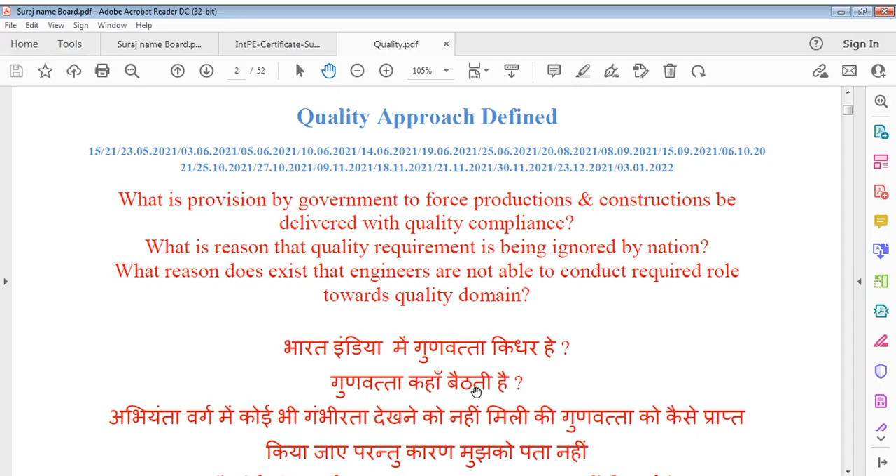Engineers were not required because there was repetitive engineering in those cases, or you can say conventional engineering. There's a time when you used to do stonework, then later brickwork.

But when structural engineering comes into play, we generally call it by the title structures or structural engineering, which is a part of civil engineering itself. Civil engineering is a wide field, and structure is a very important item within it. Structure means we have to make sure it performs successfully.

Structure doesn't mean a term only; it's the unity of body of a building, or you can say it's the framework of a building, of a structure, of whatever you construct.

A structure takes load. Whatever actions or forces are applied or imposed on a structure, these forces are taken by the structure, resisted by it, and transferred further down. Finally it goes to soil level, and is dispersed forever into soil, which we cannot call back.

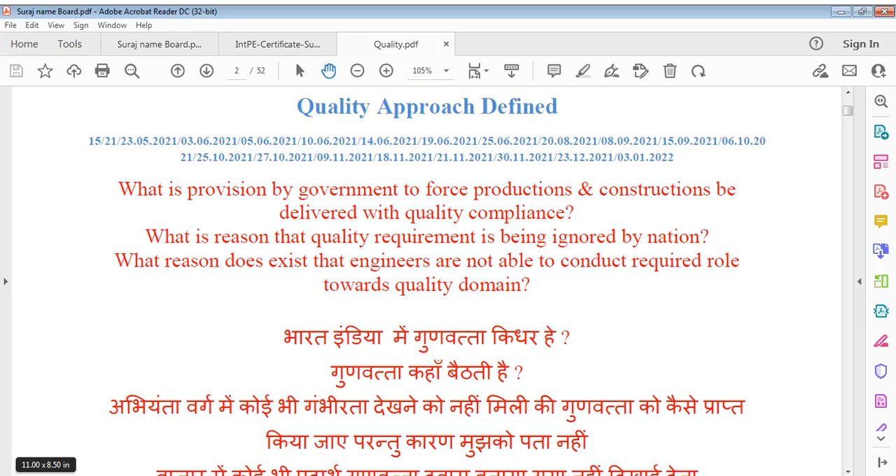My question is, what provision is there by government to force productions and constructions to be delivered with quality compliance? What is the reason that quality requirement is being ignored by the nation? What reason exists that engineers are not able to conduct the required role towards the quality domain? These are certain questions, very few questions, and there can be many more. As I said in the beginning, where does quality exist? Why does it not exist? There can be more questions—who is responsible for that?

What about the major material, concrete, in structure? What about major materials that are permanently included in structures and buildings? What about engineering materials being used to produce various hundreds of parts and goods in manufacturing? These all relate to the state of quality in our country, Bharat, India, and also in many other countries. I have written some—

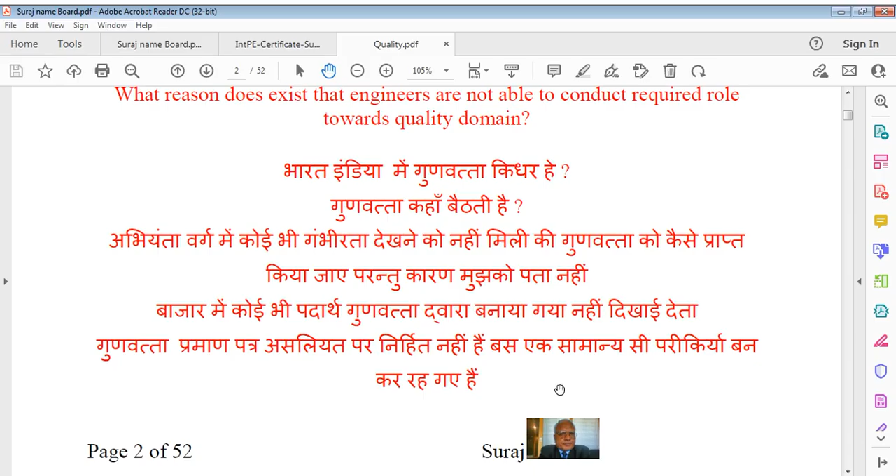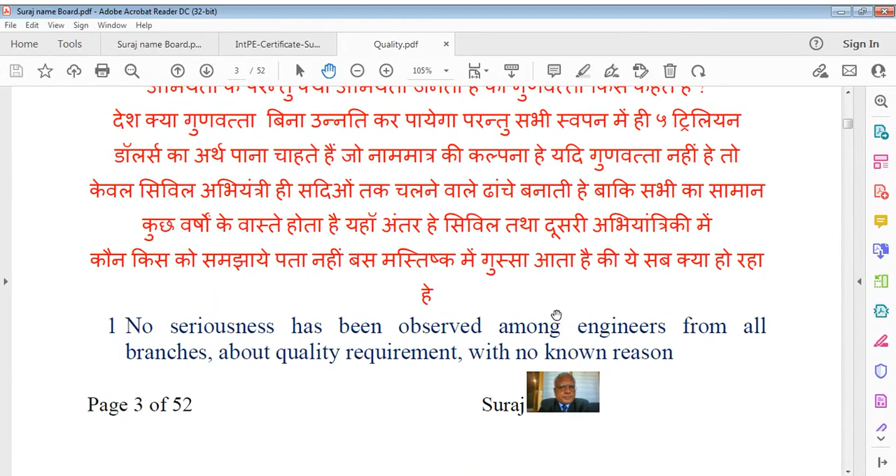Again, no seriousness has been observed among engineers from all branches about quality requirement, with no known reason. If there is some issue, there should be some reason, because there is no reason in this—that's why you could say there's no issue. That is mathematical consideration and equation, but the issue exists, because no material in the market is available that can give quality performance.

No material in markets is available that can give quality performance, yet quality mark is owned by every material manufacturer. How is it possible? This means that quality certification is not perfect, it's not reliable, or it is just for name's sake, whether it is private or government. Quality exists nowhere, it is certain for sure. It exists only in lip services, or in publicity, or in just fake claims, just to deceive purchaser, so that purchaser buys your material, your product.

And who is responsible? Partly you can say engineers have forgotten quality because of individuality or whatever reasons, and also that engineers did not study it properly, and quality could not be understood or could not be taught by professors because they themselves may not know what quality means. It means quality in education is absent. This means quality of education in itself is absent. Quality cannot be taught in education.

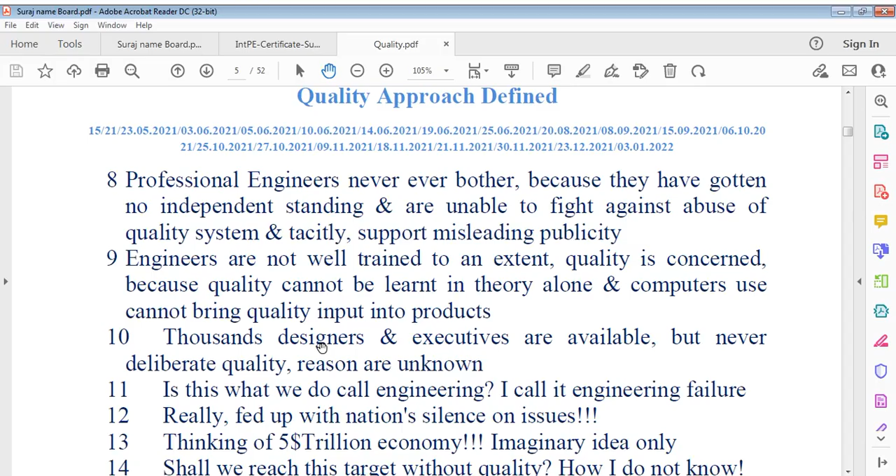I say every organization is certified by a quality system, but the existence of quality is poor. Why? Another reason is government least bothers, because it does not care for engineering and engineering products, and companies least bother because they are commerce and business oriented and believe in short-cut earning methods. These are certain points we have to consider—no long-term vision, we can say. And professional engineers never ever bother because they have gotten no independent standing and are unable to fight against abuse of the quality system, and tacitly support misleading publicity.

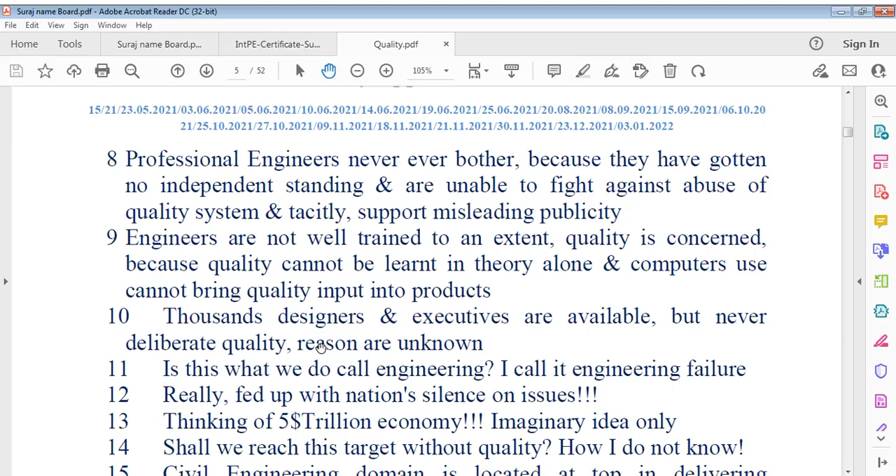So we can say it's a complex of questions, complexity of questions we are talking of. But where does the problem lie? My question is that—where does the problem actually lie, and why have we been ignoring it?

It's a very simple answer, I can say. Again, I say when you learn engineering, when one becomes professional, one must be given, you can say, value. It's not that you always remain an infant. When you do an engineer's job, it may be the lowest one, but it is responsible oriented. Engineer means responsible oriented because it's part of life, part of economy. No economy in world can develop, no economy in world can move if engineers cannot keep themselves well oriented, well trained, well used to the job, and the reliability factor remains higher.

Engineer means use all these resources - material, human resources, machine resources, time resource, money resource, value resource - and to meet demand with supply, and to meet supply with demand. This is a very complex statement, you can say, but this is reality.

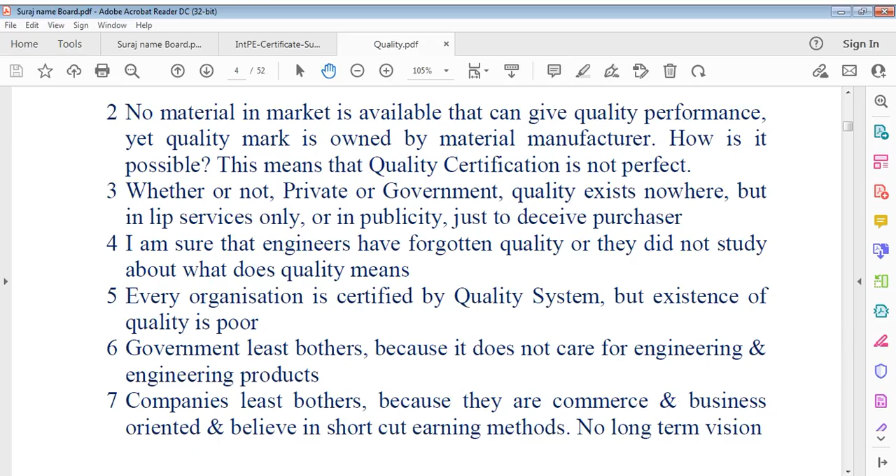Whether you are national or international, it has no value now until you provide good products. Nobody believes in quality these days, and that's a fact. Maybe a few percentage of people are there who work, but people are more or less business oriented and they believe in shortcut methods of making money, and no long-term vision stands these days. That's why I say professional engineers never ever bother.

Professional engineers never bother, because they have gotten no independent standing and are unable to fight against abuse of quality system, tacitly supporting misleading publicity.

Professional engineer, when I say this, means an engineer who stays engaged in the profession. It doesn't mean just educationally qualified—education qualified plus experience, or you can say plus the habit of learning more and more.

Only experience is not enough. You cannot simply count on experience of so many years if that experience is only doing repetitive jobs, rather than doing more based on more learning or teaching. Engineering is such a field that if you work, you have to learn something every day, or teach someone something every day.

No engineering knowledge remains constant. Every day you learn something in whatever way—maybe in 24 hours you learn at least one or two hours of something. Otherwise, sometimes we don't even know we're learning.

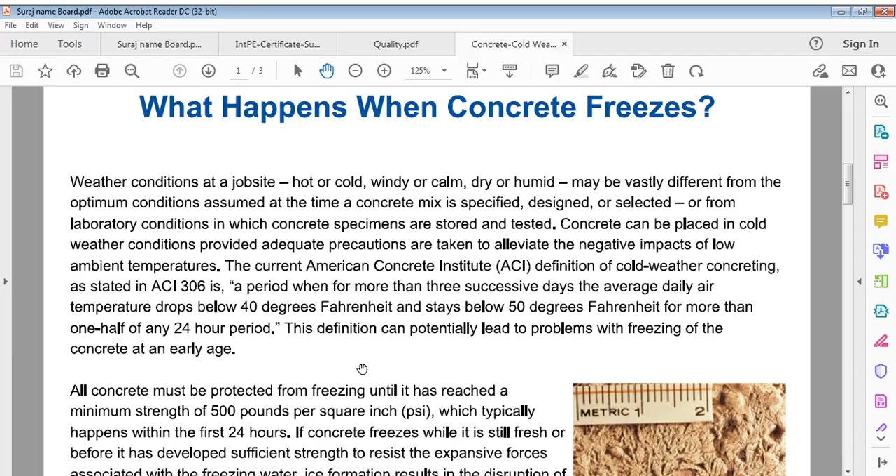And there is some reference from an institute, we know that's ACI - American Concrete Institute - which also defines cold weather concreting, in reference ACI 306, and it defines that. We have already defined that, but what we say here is that all concrete must be protected from freezing until it has reached a minimum specified strength. And if concrete freezes while still fresh, or before it has developed sufficient strength to resist expansive forces associated with the freezing water, ice formation results in disruption of the cement paste matrix, causing an irreparable loss in strength. You can say if it freezes, it can result in reduction up to 50% in ultimate strength - 50% reduction can be.

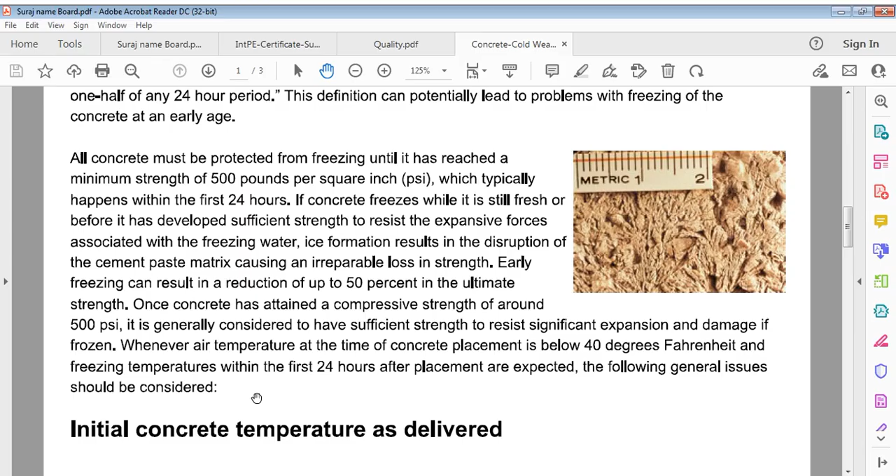Once concrete has attained the required compressive strength, it is generally considered to have sufficient strength to resist significant expansion and damage if frozen. So the definition of temperature is there, we already know it. So what we say is protection while concrete is placed, consolidated, and finished - they have used the word consolidated, okay, it's a different word in different countries, we have to know what it means. Exposure of concrete to cold weather conditions extends the time required for it to reach initial set, meaning the initial setting time is automatically impacted, which requires finishing crews to be available for a longer period depending on actual ambient temperature.

Protection of a concrete placement may require use of windbreaks, enclosures, or supplementary heat. It's also appropriate to adjust concrete mixture constituents for the effect of ambient temperature on setting time, which may require an increase in cement content or use of an accelerating chemical admixture, or both.

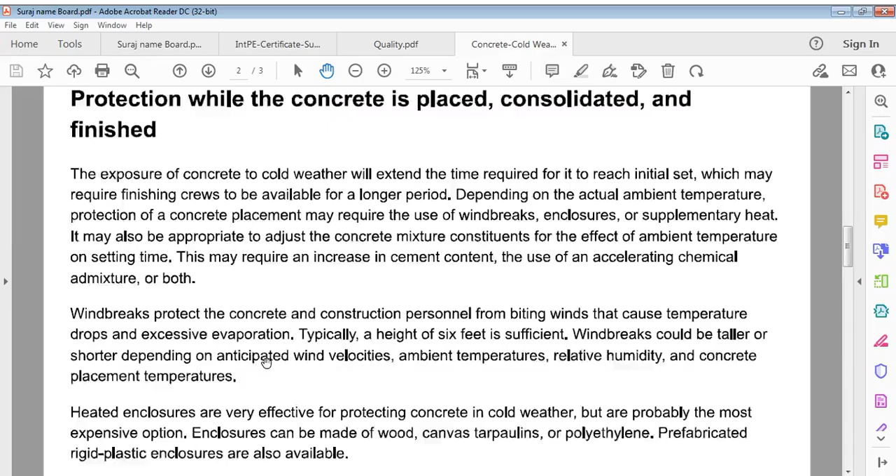So these are certain points we are reconsidering, and we can say why. Windbreaks protect concrete and construction personnel from biting winds that cause temperature drops and excessive evaporation. You may say 1.8 or 2 meters height is enough for windbreaks, but taller is better, depending on existing wind velocity, ambient temperature, and relative humidity at the time we place concrete.

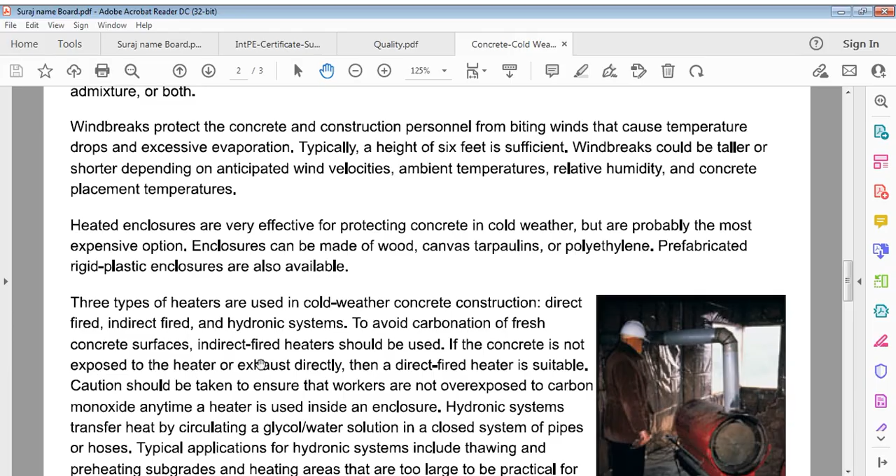Enclosing that area, or heated enclosures, are very effective for protecting concrete in cold weather conditions, but it's expensive because you have to spend money on wood, canvas tarpaulins, or polyethylene. Prefabricated rigid plastic enclosures are also available. So you can also use heaters.

Types of heaters used in cold weather construction can be direct fired, indirect fired, or a hydronic system. To avoid carbonation of fresh concrete surfaces, an indirect fire heater should be used. If concrete is not exposed directly to the heater or exhaust, a direct fire heater is suitable. Caution should be taken to make sure workers are not overexposed to carbon monoxide.

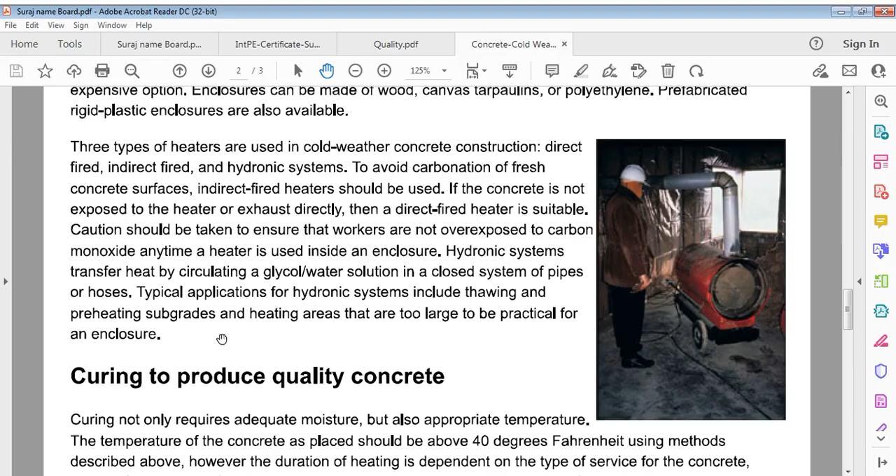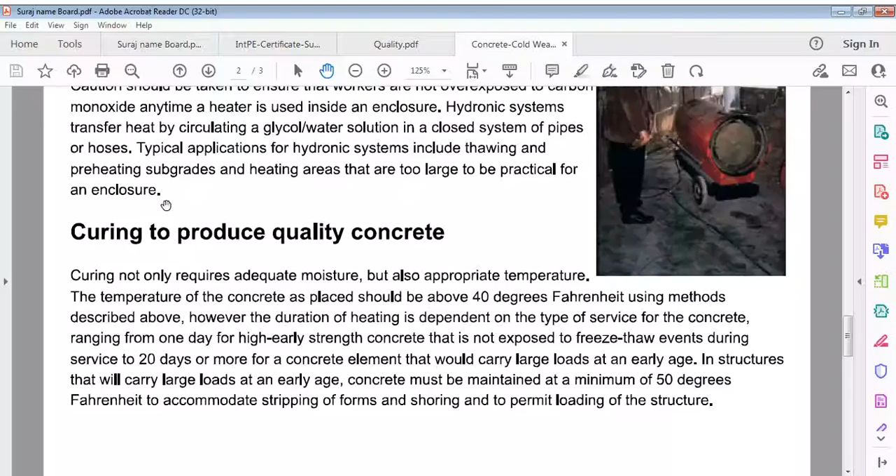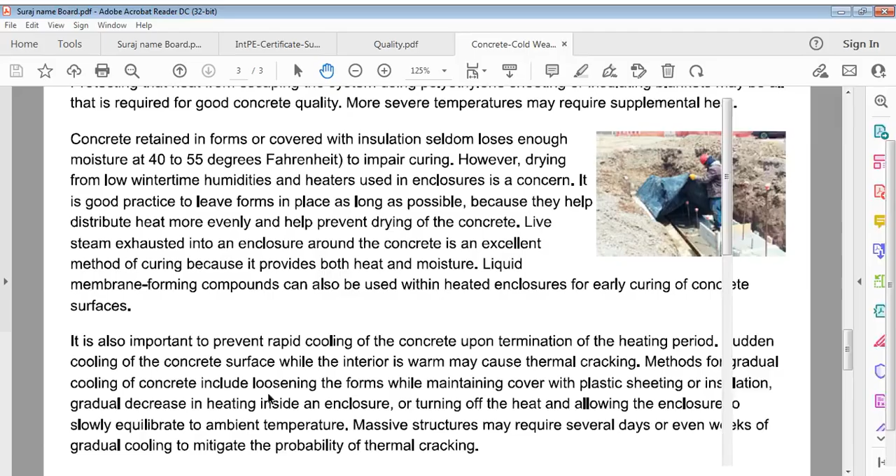Curing not only requires adequate moisture, but also appropriate temperature. You have to understand all this, and we have it in the file. I don't want to go on repeating this, so let's go to the other file. This is about concrete in cold weather conditions. In this file, it's just one page.

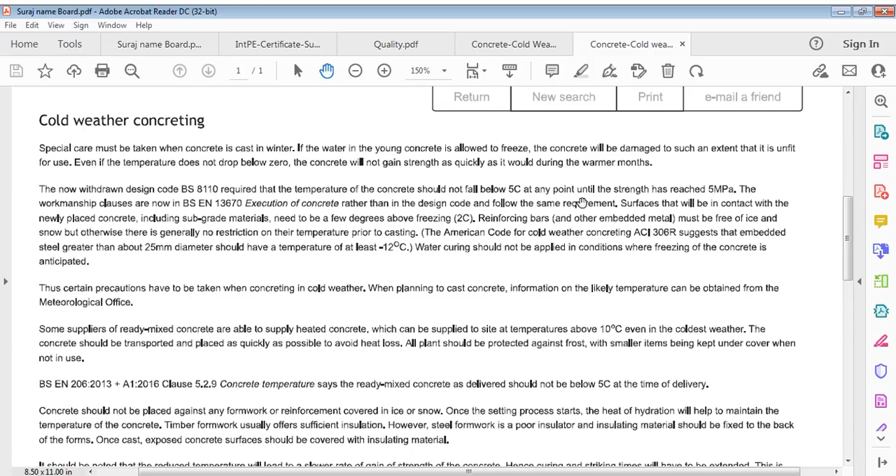Thus certain precautions are required when placing concrete in cold weather conditions. When planning to cast concrete, information on likely temperature can be obtained from our office or the meteorological department, as the contractor knows it. Some suppliers of ready-mix concrete are able to supply heated concrete, which can be delivered to site at a temperature above 10 degrees Celsius. That's good, in fact, even in the coldest weather.

Concrete should be transported and placed as quickly as possible to avoid heat loss. All plant should be protected against frost, with smaller items kept under cover when not in use. Ready-mix concrete that is delivered should not be below 5 degrees Celsius at the time of delivery, and should not be placed against formwork or reinforcement covered in ice or snow. This is a point to remember.

Once the setting process starts, heat of hydration helps maintain the temperature of concrete. Timber formwork usually offers sufficient insulation, however steel formwork is a poor insulator, so an insulating material should be fixed to the back of the form. Once cast, exposed concrete surfaces should be covered with insulating material.

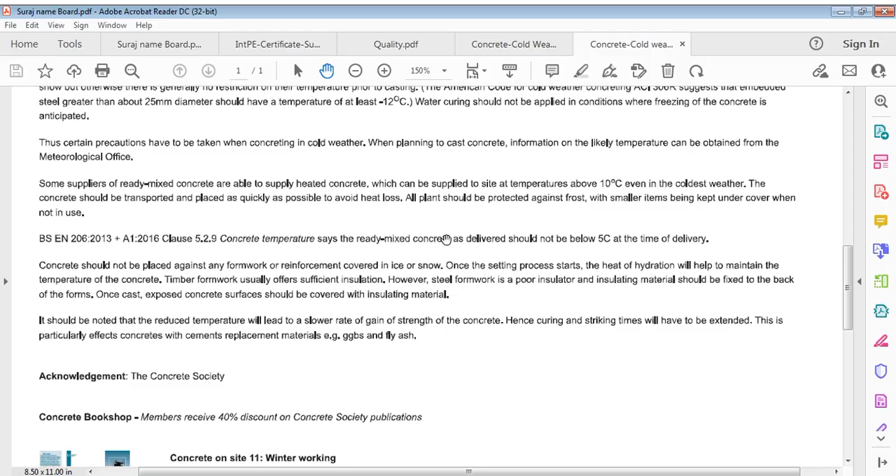It should be noted that reduced temperature shall lead to a slower rate of gain of strength of concrete. Hence, curing and striking times have to be extended. This particularly affects concretes with cement replacement materials, such as GGBS and fly ash.

This is one file I tried to reference to. I'm closing this file to open another, and that is this diagram, a guide to cold weather concrete and precautionary tips for pouring concrete. Let's take this one first. It says concrete precautionary tips for pouring concrete. I repeated this before also, but I'm just telling you some points for refreshing.

It states that there are some mistakes we have to avoid when working with concrete in cold weather. When temperature fluctuates, concrete is subject to different curing conditions, resulting in sporadic strength gain.

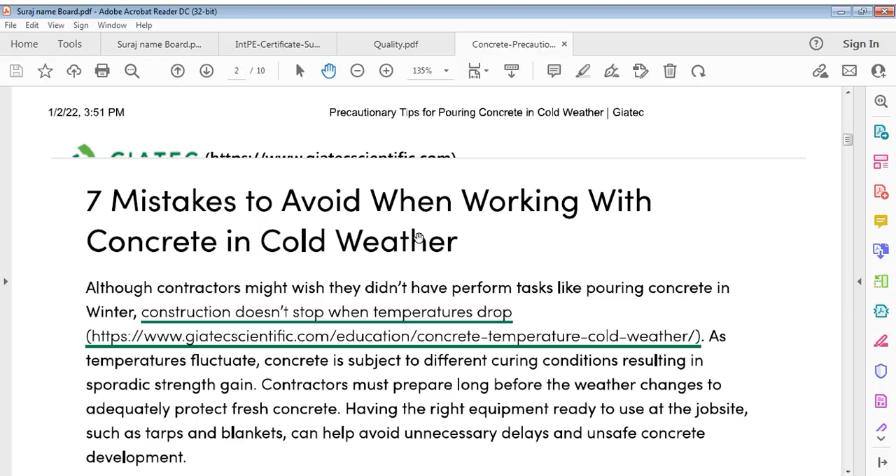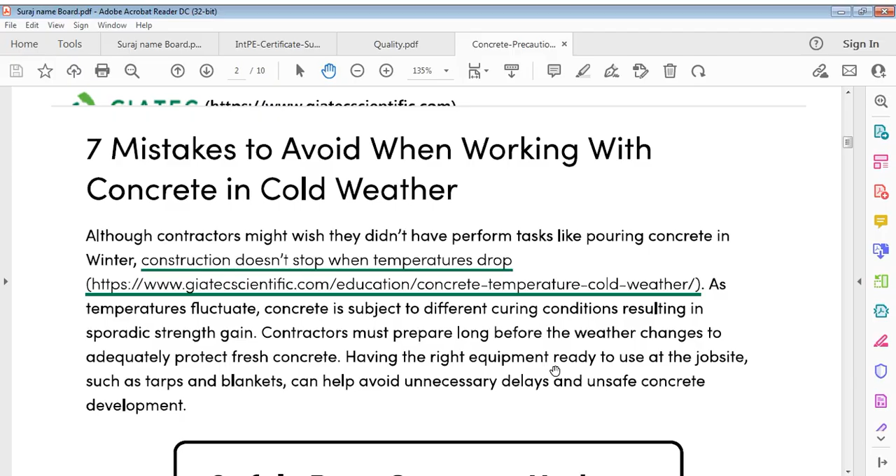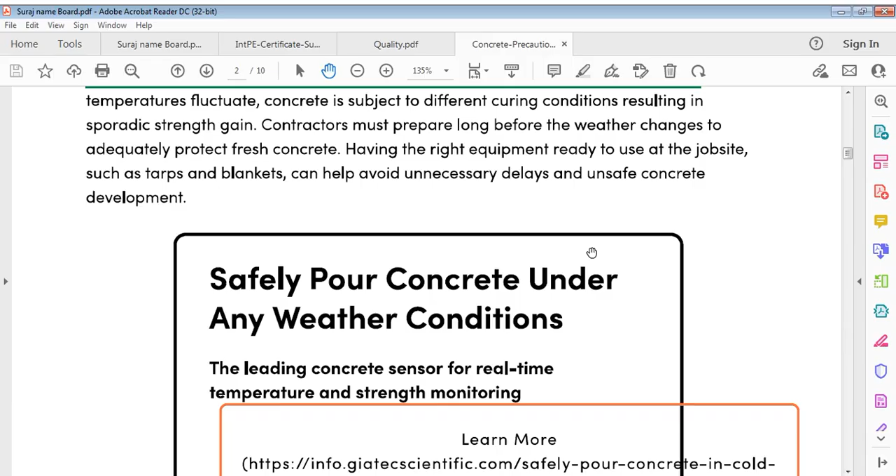Contractors must prepare long before weather changes to adequately protect fresh concrete. Having the right equipment ready to use at the job site, such as tarps and blankets, can help avoid unnecessary delays and unsafe concrete development.

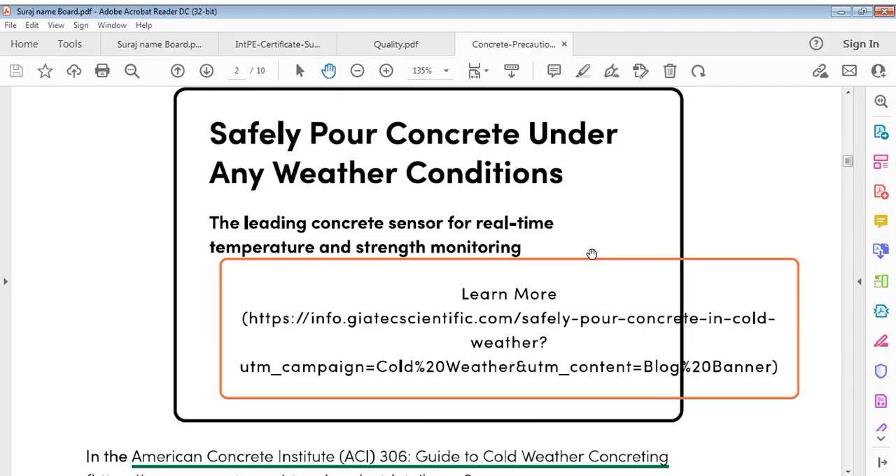Concrete with different temperature gradients doesn't develop strength adequately, leading to cracks and possible structure damage or disaster. When placing your concrete, placement of the slab factors into the effectiveness of concrete curing conditions.

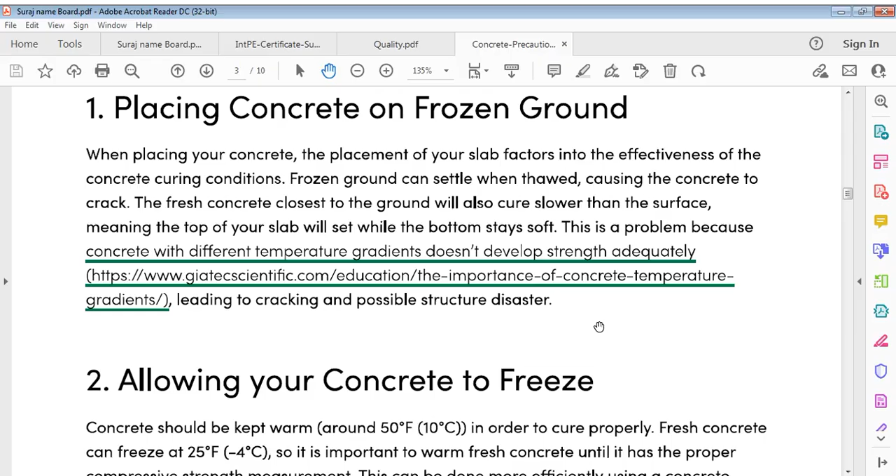Frozen ground can settle when thawed, causing concrete to crack. Fresh concrete closest to the ground also cures slower than surface concrete, meaning the top portion of the slab sets while the bottom does not set at the same time.

If you allow concrete to freeze, that's another mistake. Concrete should be kept warm in order to cure properly, at a temperature around 10 degrees Celsius. Though it's not warm, in the language of temperature, concrete can be called good at about 10 degrees Celsius.

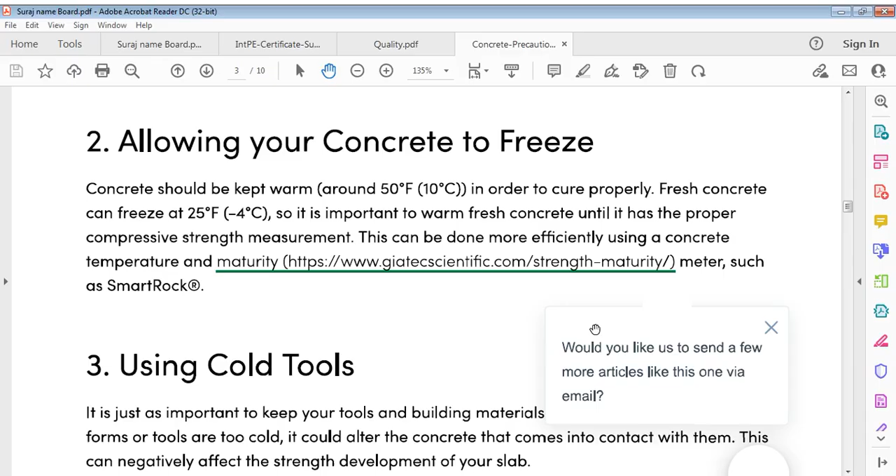Fresh concrete can freeze at -4 degrees Celsius. That's why it's important to warm fresh concrete until it has proper compressive strength, and this can be done better using a concrete temperature meter.

Then we have using cold tools. It's important to keep your tools and building materials, forms or tools, from being too cold. It could alter the concrete that comes into contact with them, negatively affecting strength development of your slab.

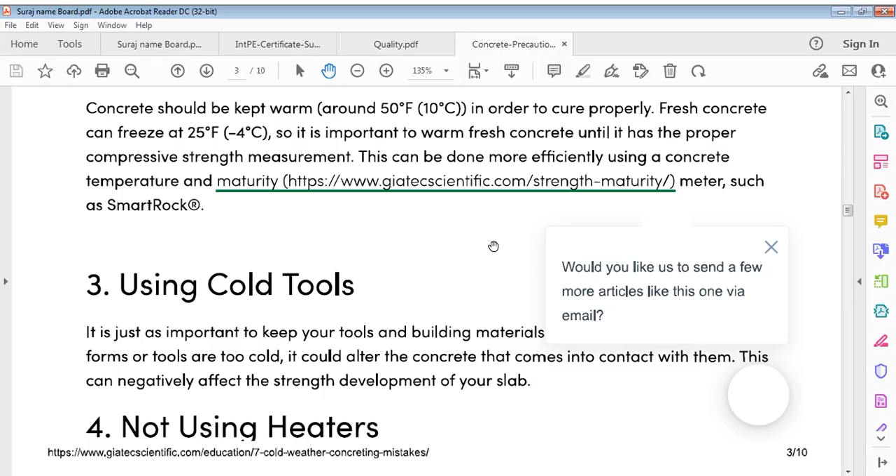Another mistake is not using heaters. Concrete requires staying warm in order to continue curing and develop strength. If it gets too cold in temperature, curing stops altogether.

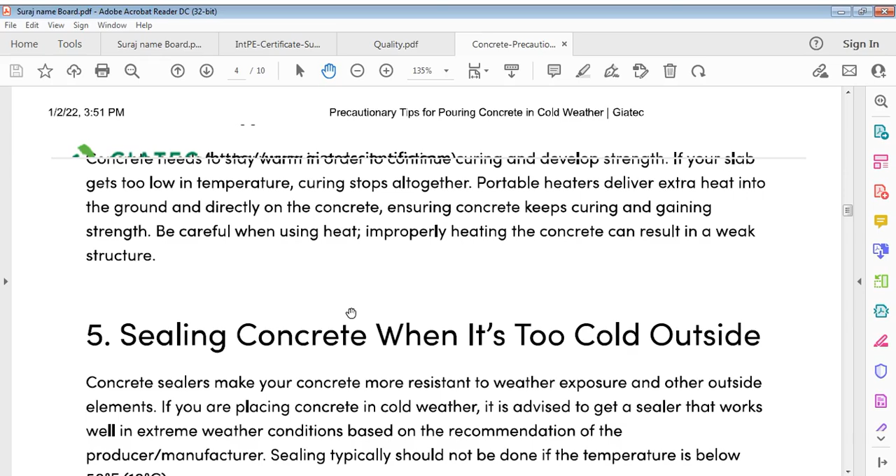Portable heaters deliver extra heat into the ground and directly on concrete, ensuring concrete keeps curing and gaining strength. Yet take care when using heat - improperly heating concrete can result in weak structures.

Don't seal concrete when it's too cold outside. Concrete sealers make your concrete more resistant to weather, exposure, and other outside elements. If concrete is placed in cold weather, it's wise to get a sealer that works well in extreme weather conditions, based on the recommendation of the manufacturer. Sealing typically should not be done if temperature is below 10 degrees Celsius.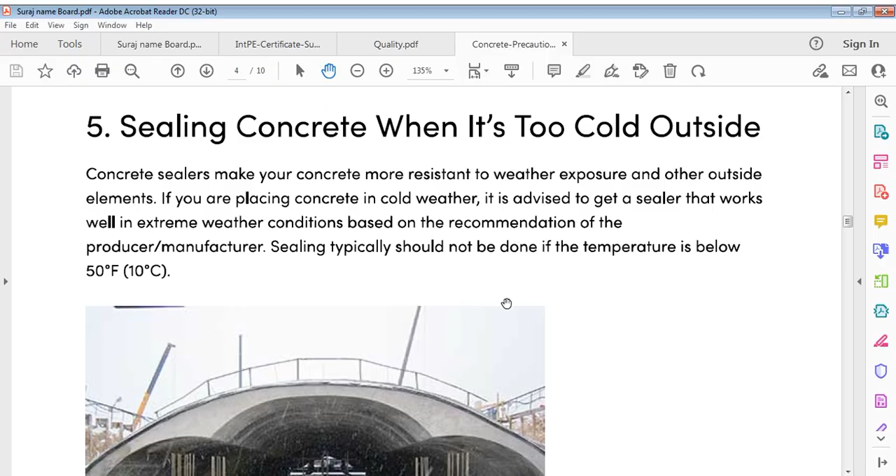Of daylight lessens.

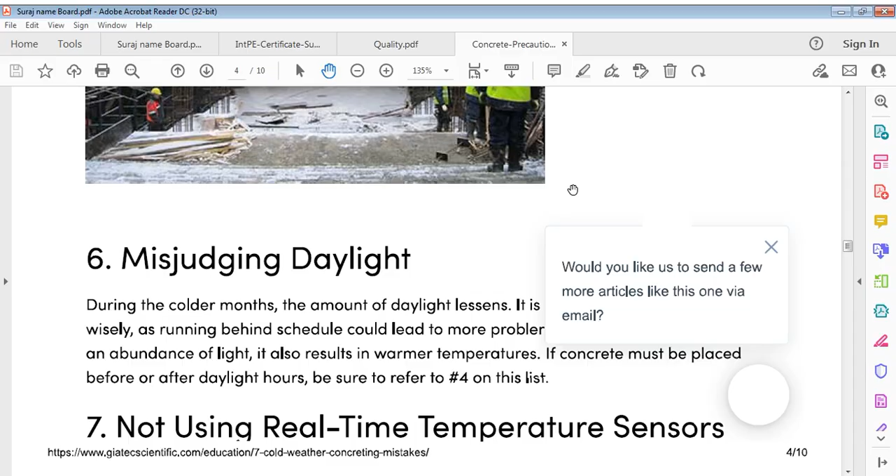Temperature monitoring in cold weather is important to ensure production of high quality concrete that meets thermal control plan specifications. If proper attention is not given to strength development of concrete, several common problems can occur.

Among these problems are freezing of concrete at early ages, lack of required strength, rapid temperature changes, inadequate protection of the structure and its serviceability, and improper curing procedures.

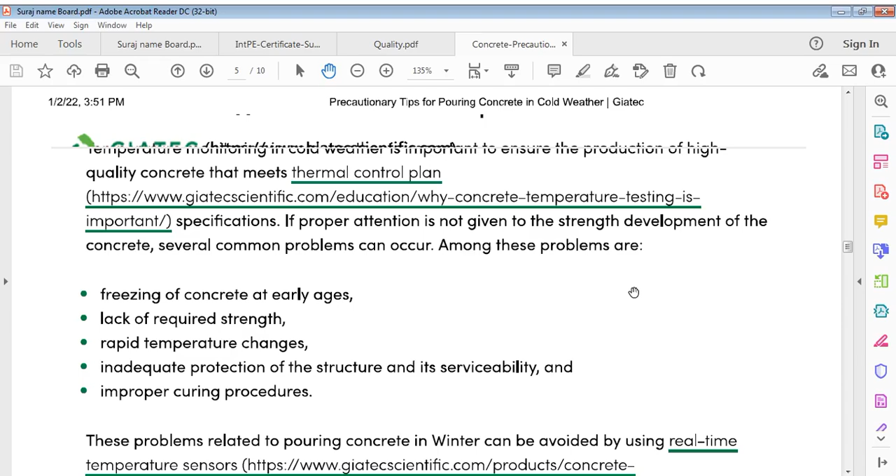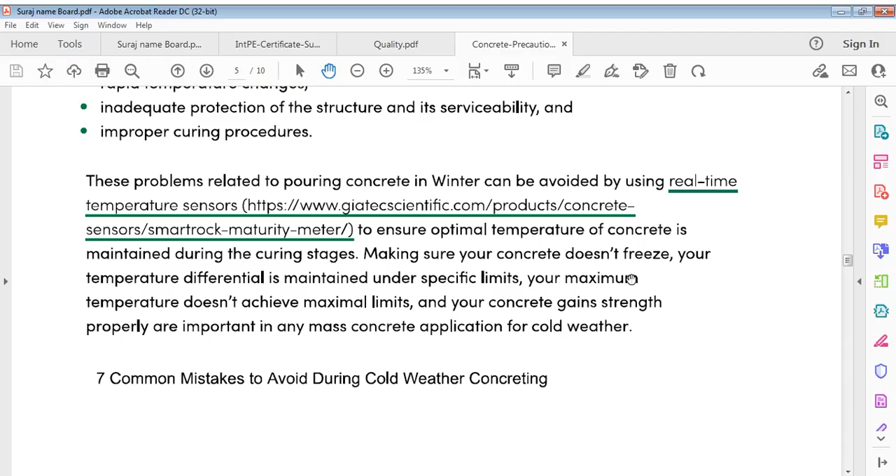Problems with concrete in winter can be avoided by using real-time temperature sensors to ensure optimal temperature of concrete is maintained during curing stages. Making sure concrete doesn't freeze, temperature differential is maintained under specific limits. The maximum temperature should not exceed limits, and concrete gaining strength properly is important in whatever mass concrete is applied for cold weather.

This was what it says, for example, as reference. According to many construction experts working on concrete, cold weather is certainly difficult. Pouring can be difficult, as also being exposed to humidity and wetness of cold weather.

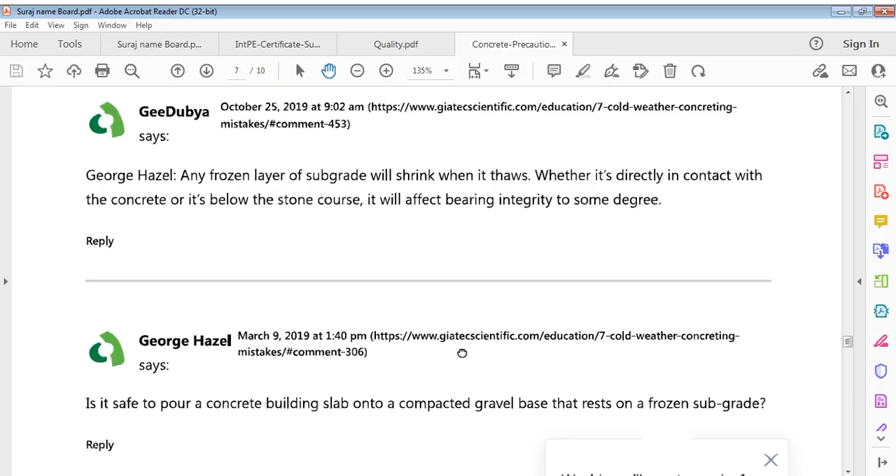A frozen layer of subgrade shrinks when it thaws. When it's directly in contact with concrete or it's below stone course, it shall affect bearing integrity to some degree. Is it safe to pour concrete onto a compacted gravel base that is frozen? There are so many such questions, and we can answer them.

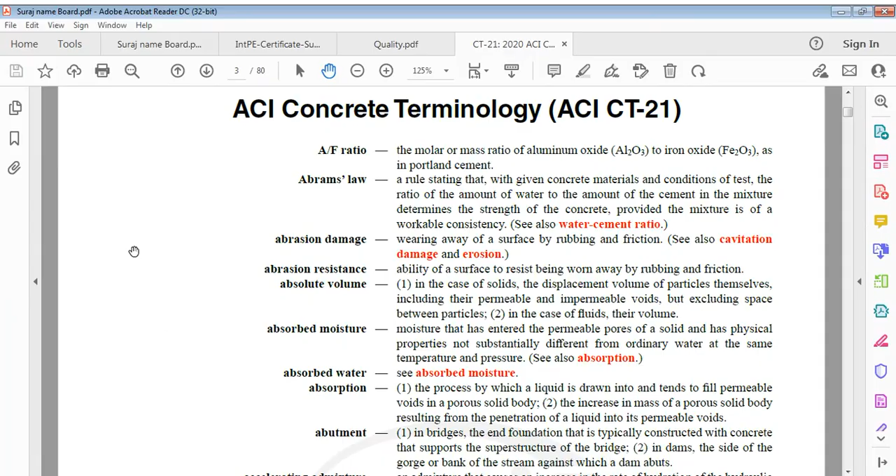AF ratio, what does it mean? Size, molar or mass ratio of aluminum oxide. Let me blow up a little more so we can see better. This is concrete terminology from ACI CT 21. AF ratio is molar or mass ratio of aluminum oxide Al2O3 to iron oxide Fe2O3 as in Portland cement. A stands for Al2O3 and F stands for iron oxide. This is called the mass ratio of aluminum oxide Al2O3 divided by iron oxide Fe2O3 as in Portland cement. These general definitions are terminology, not sequenced, provided alphabetically here.

Abrams' law: a rule stating that with given concrete materials and conditions of test, the ratio of amount of water to amount of cement in the mixture determines the strength of concrete, provided the mixture is of a workable consistency. This is also known as the water cement ratio.

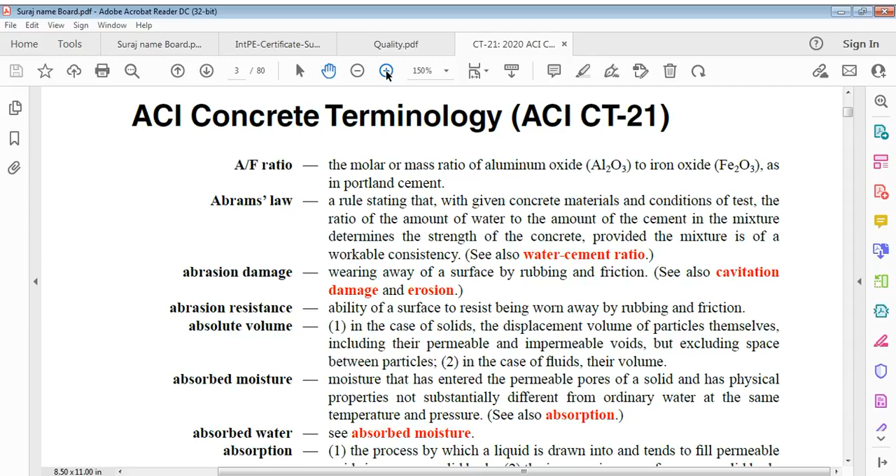Videos and audio signals have fallen. I hope the video doesn't stop and it's not working.

There is another one, absorption. My voice may not be recorded. Let me continue, some signals are there now. Let's say absorption, there are also two parts, that is the process by which a liquid is drawn.

Absorption is the process by which a liquid is drawn into and tends to fill permeable voids in a porous solid body. This is number one.

Absorption is also the increase in mass of a porous solid body resulting from penetration of a liquid into its permeable voids.

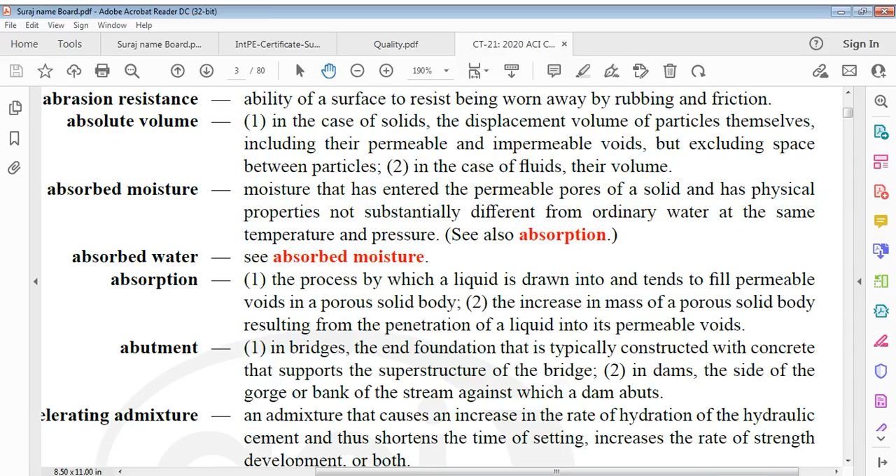Accelerating admixture it is. The signal drops continuously, both video and audio, 0, 0.

Accelerating admixture: an admixture that causes an increase in rate of hydration of hydraulic cement and thus shortens time of setting, increases rate of strength development, or both. It is called accelerating admixture because it accelerates the rate of hydration.

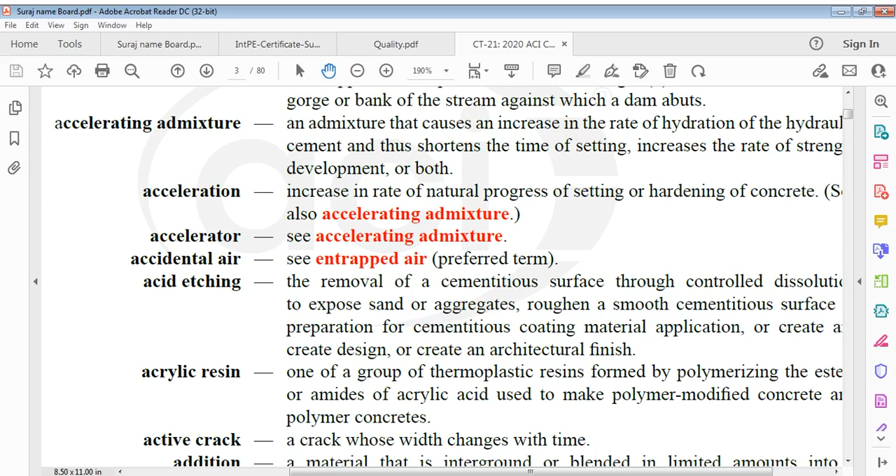This is, okay I see, so it is accelerating admixture defined. Again, signals continue to fail. I don't think I'll continue, 7 FPS and 0, 0 video and audio. 7 FPS means it won't work. I'm waiting, not sure if I got signals back or it's 7 FPS. Some signals, let us say, acceleration, FPS is 3, again very low. Okay, something.

Acceleration: increase in rate of natural progress of setting or hardening of concrete.

Accelerator and accidental air. We are now going to acid etching.

Acid etching is removal of a cementitious surface through controlled dissolution to expose sand or aggregate. It can also mean to roughen a smooth cementitious surface in preparation for cementitious coating material application, or to create art, create a design, or create an architectural finish.

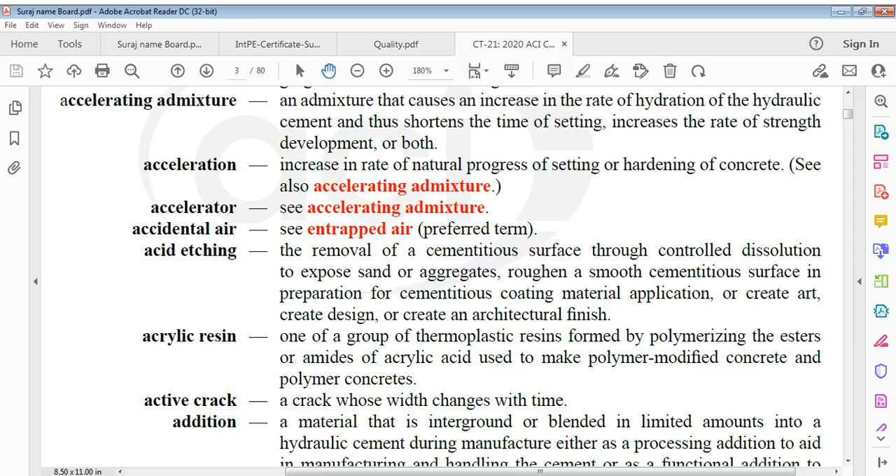Acrylic resin: one of a group of thermoplastic resins formed by polymerizing esters or amides of acrylic acid, used to make polymer modified concrete and polymer concretes.

Active crack: a crack whose width changes with time.

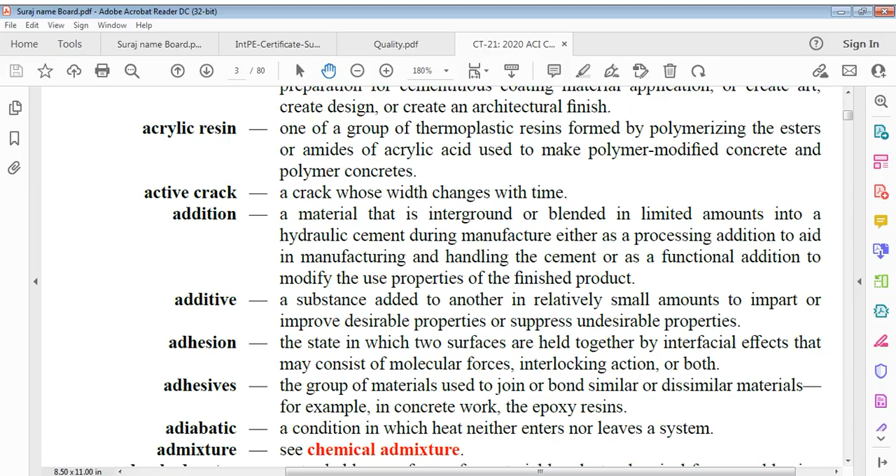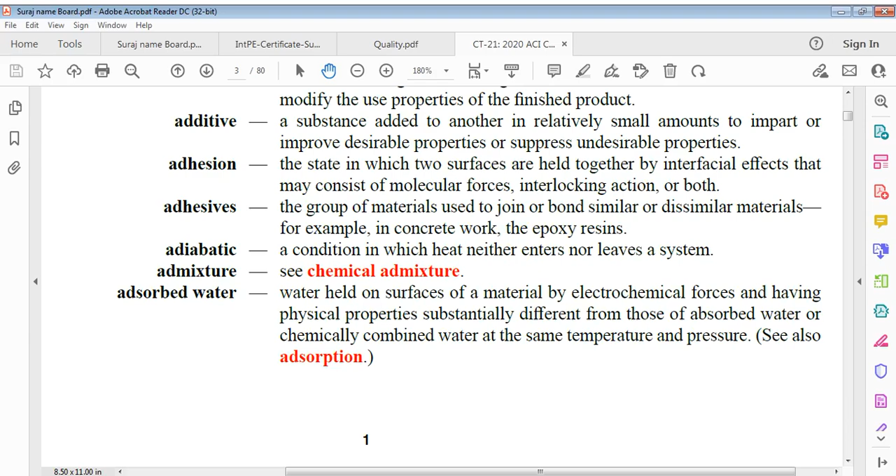Now, adsorbed water. Water held on surfaces of a material by electrochemical forces, and having physical properties substantially different from those of absorbed water. Mind it, we are talking adsorbed water, not absorbed water.

So what is our definition of adsorbed water? Again, because there's confusion on this: water held on surface of a material by electrochemical forces, and having physical properties substantially different from those of absorbed water or chemically combined water, at the same temperature and pressure.

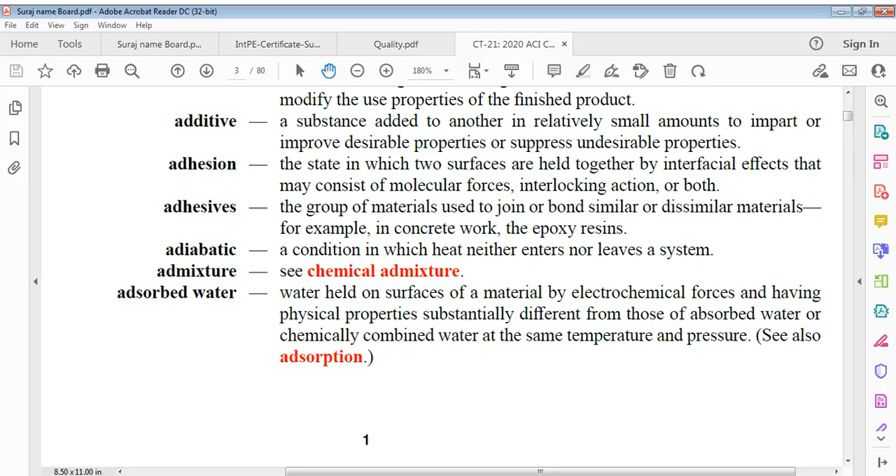Adsorption: development of a higher concentration of a substance at the surface of either a liquid or solid than exists in the bulk of the medium; the process by which a substance is adsorbed, such as at the surface of cement paste or aggregate.

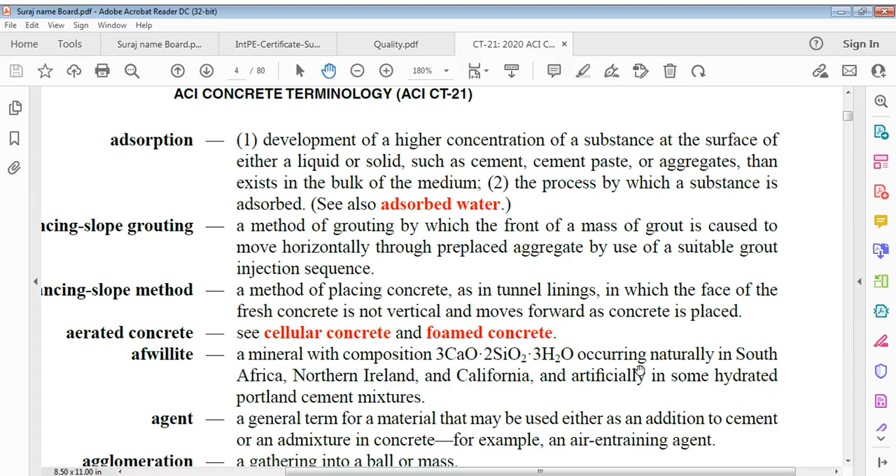Advancing slope grouting: a method of grouting by which the front of a mass of grout is caused to move horizontally through pre-placed aggregate by use of a suitable grout injection sequence.

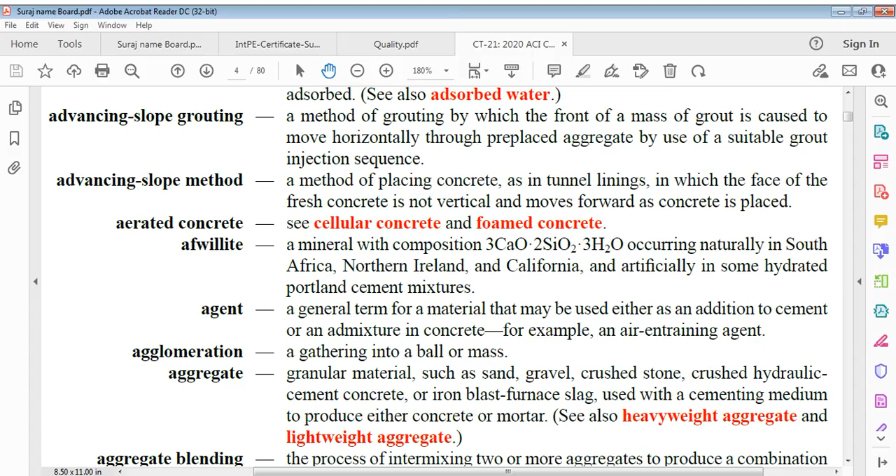Then we have aggregate blending. Aggregate blending is the process of intermixing two or more aggregates to produce a combination with improved grading or other properties.

Aggregate interlock is the effect of portions of aggregate particles from one side of a joint or crack in concrete protruding into a recess on the other side of the joint or crack, to transfer load in shear and maintain alignment. This is an important definition.

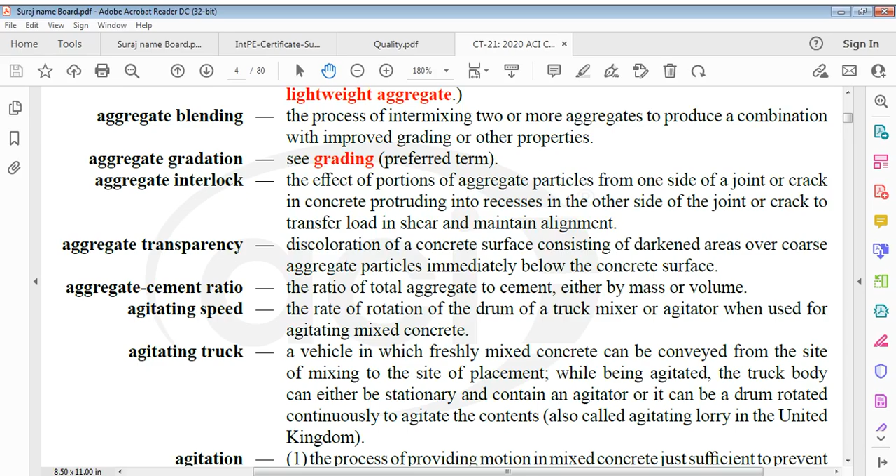Agitation is the process of providing motion in mixed concrete just sufficient to prevent segregation or loss of workability, and also mixing and homogenizing of slurries or finely ground powder by either mechanical means or injection of air.

Agitator is a device for maintaining workability and preventing segregation of mixed concrete by agitation.

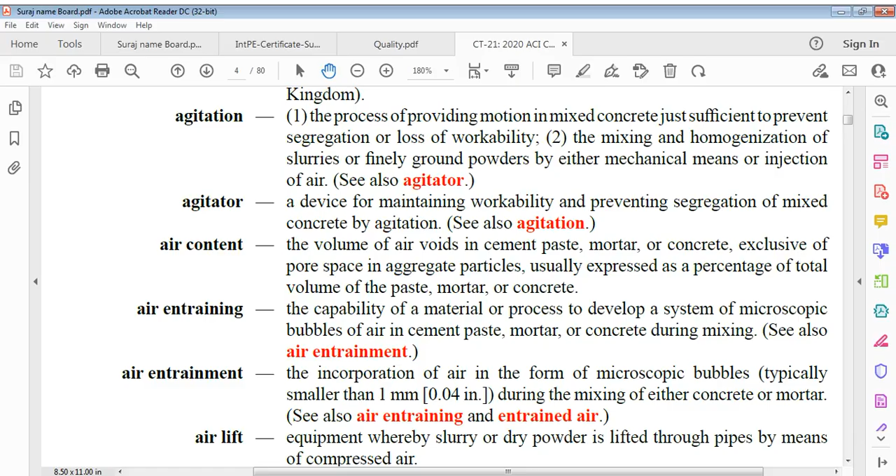Air content. Pore space in aggregate particles is usually expressed as a percentage of the total volume of paste, mortar or concrete.

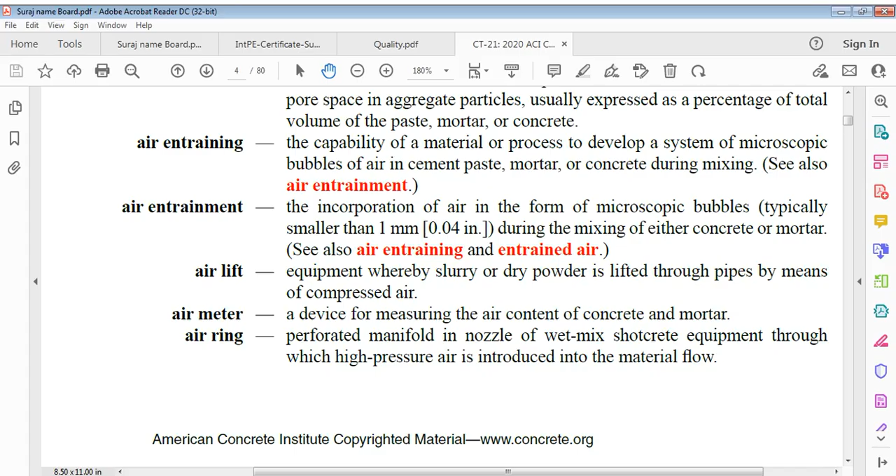Air content: volume of air voids in cement paste, mortar or concrete, exclusive of pore space in the aggregate particles, expressed as a percentage of the total volume of paste, mortar or concrete.

Air entrainment, air entrainment. I have to go up for a couple of minutes, just let me finish this.

Air entraining: capability of a material or process to develop a system of microscopic bubbles of air in cement paste, mortar or concrete during mixing.

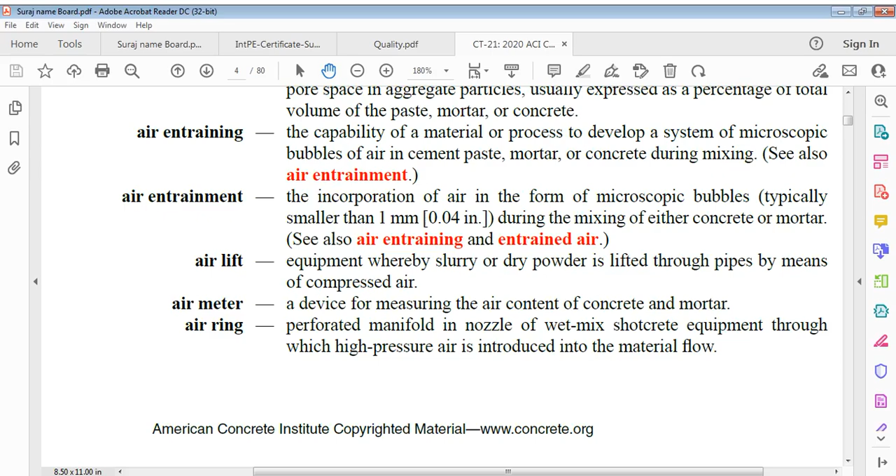We have then air separator. Just give me some minutes, I'll be back and do it.

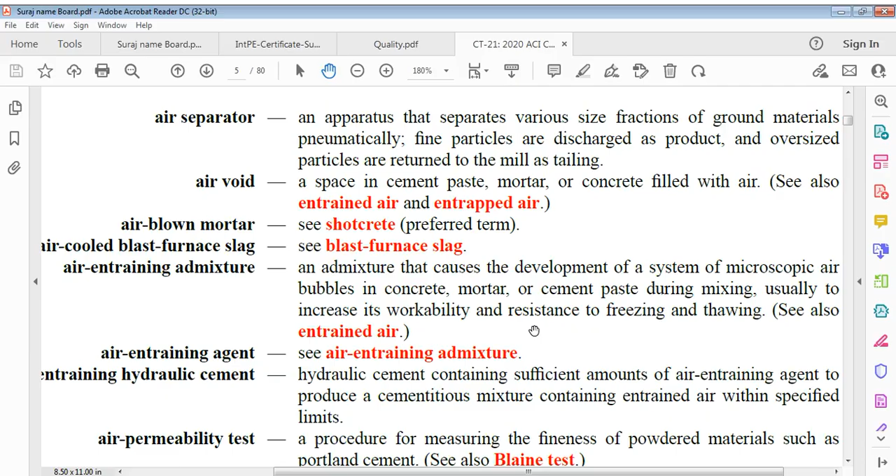An air void is a space in cement paste, mortar or concrete filled with air. Air blown mortar, we can say shotcrete, and blast furnace slag, and air entraining admixture.

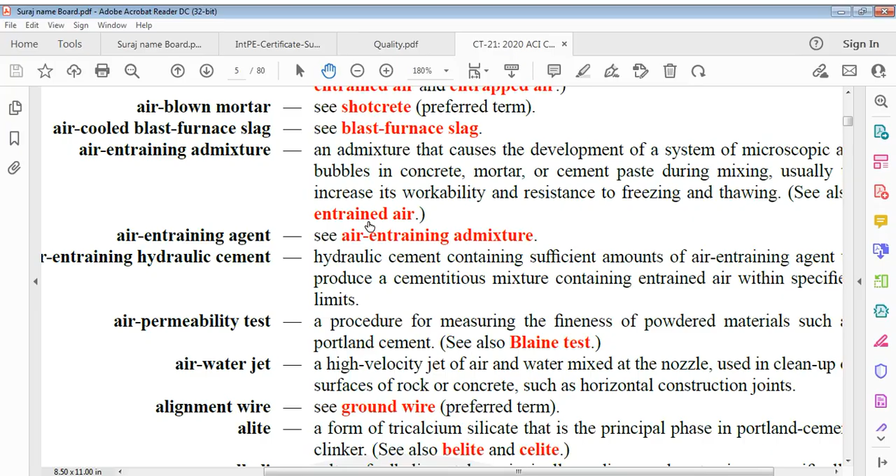Air entraining admixture: an admixture that causes the development of a system of microscopic air bubbles in concrete.

Air entraining admixture: development of microscopic air bubbles in concrete, mortar or cement paste during mixing, usually to increase its workability.

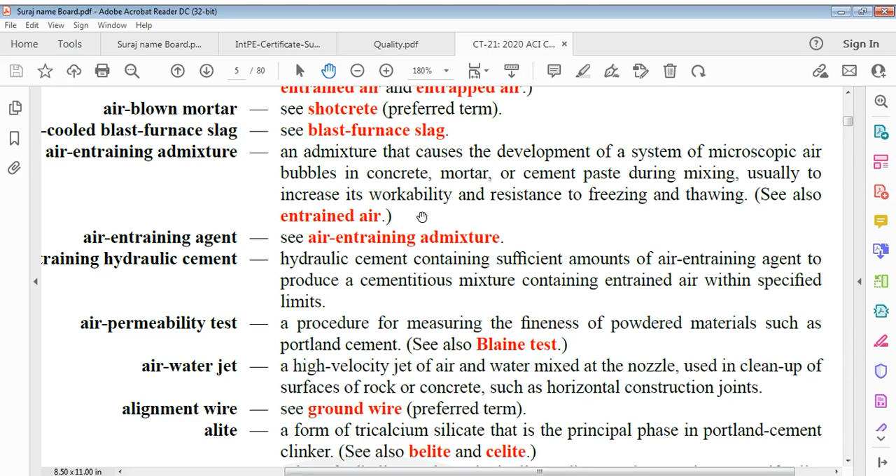Air-entraining hydraulic cement: containing entrained air within specified limits. Or redefined as hydraulic cement containing sufficient amount of air entraining agent to produce a cementitious mixture containing entrained air within specified limits.

Air permeability test: procedure for measuring fineness of powdered material such as Portland cement, also called the Blaine test, air permeability test.

Air water jet: high velocity jet of air and water mixed at a nozzle, used in cleanup of surfaces of rock or concrete, such as a horizontal construction joint.

Alignment wire: ground wire, alite.

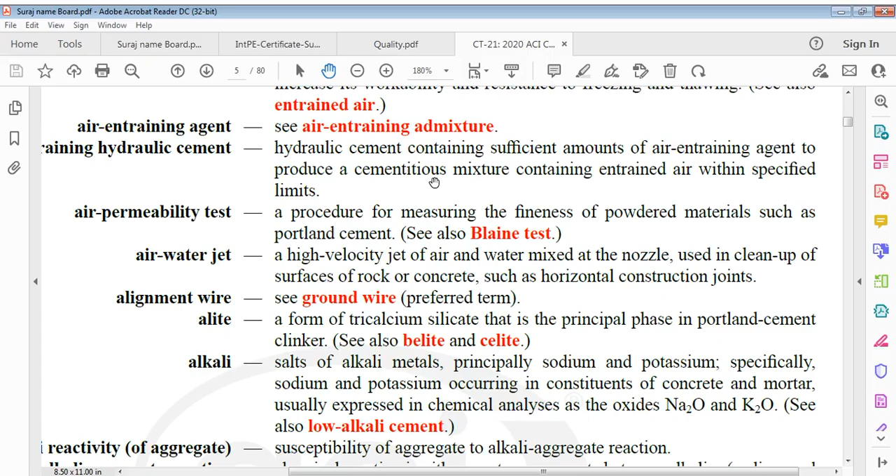Alite: tri-calcium silicate, the principal phase in Portland cement clinker.

Alkali: salt of alkali metals, principally sodium and potassium, occurring in constituents of concrete and mortar, usually expressed in chemical analysis as oxides Na2O and K2O.

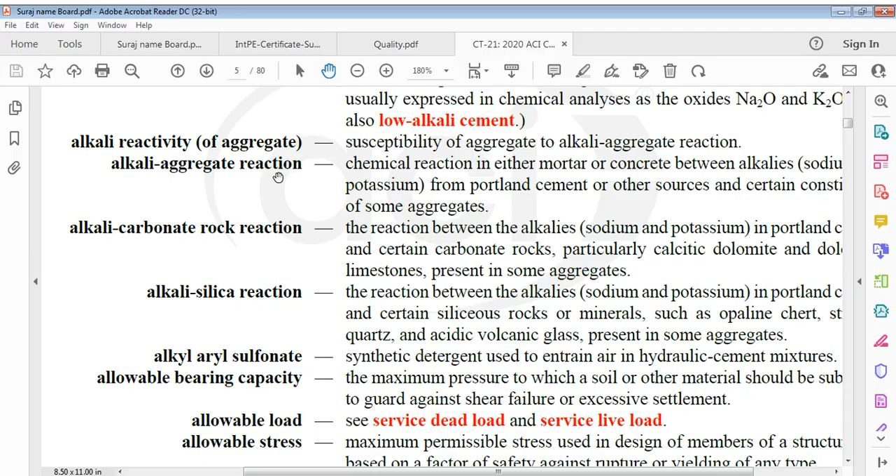Alkali reactivity of aggregate: susceptibility of aggregate to alkali aggregate reaction. Alkali aggregate reaction is a chemical reaction in either mortar or concrete between alkalis, that is sodium and potassium from Portland cement or other sources, and certain constituents of some aggregate.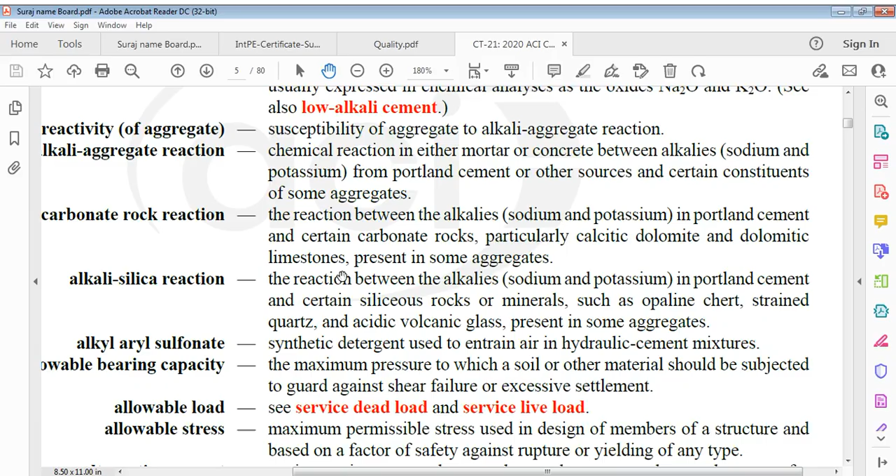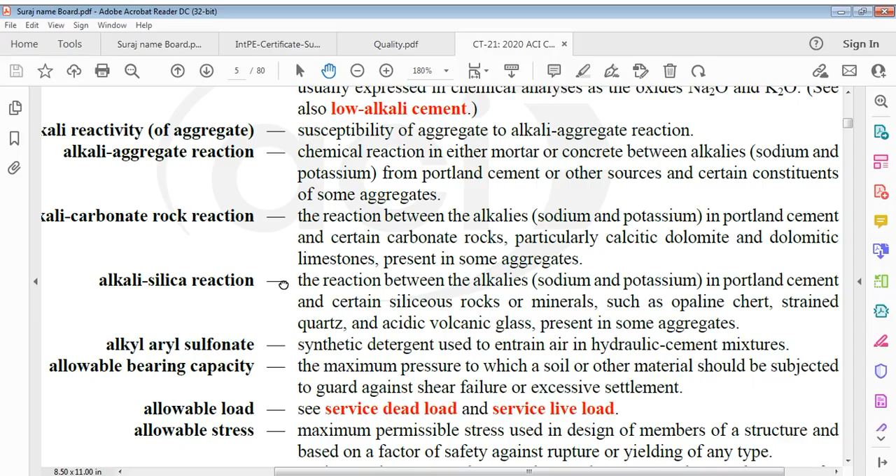Alkali carbonate reaction: reaction between alkalis, sodium and potassium, in Portland cement, and certain carbonate rocks, particularly calcitic dolomite and dolomitic limestones, present in some aggregates.

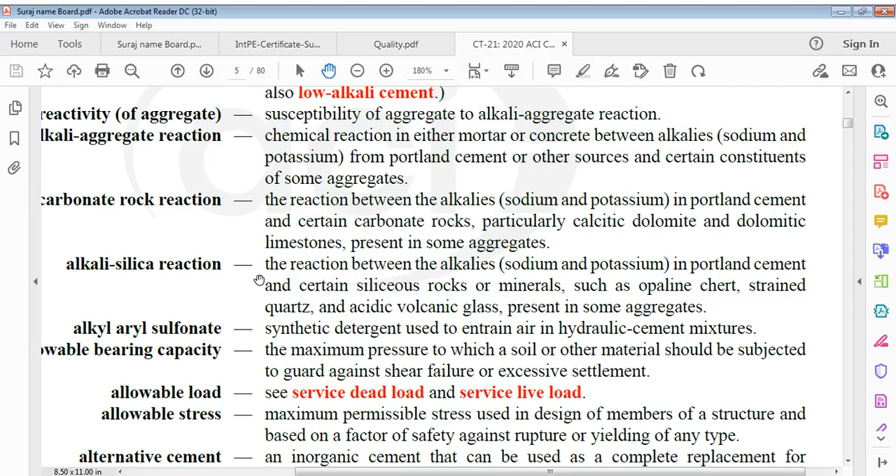Alkali silica reaction: reaction between alkalis, sodium and potassium, in Portland cement, and certain siliceous rocks or minerals such as opaline chert, strained quartz and acidic volcanic glass present in some aggregates.

Alkali silica reaction, restated: reaction between alkalis, sodium and potassium in Portland cement, and certain siliceous rocks or minerals such as opaline chert, strained quartz and acidic volcanic glass present in some aggregates.

Alkyl aryl sulfonate: a synthetic detergent used to entrain air in hydraulic cement mixture.

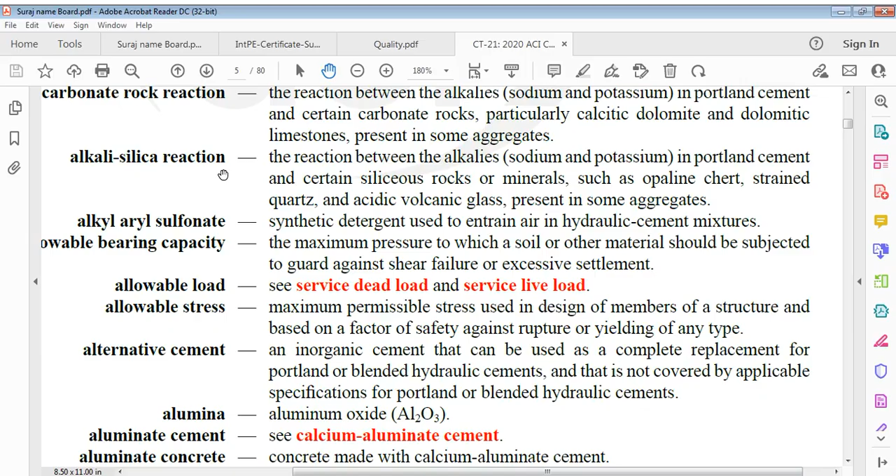Allowable bearing capacity: maximum pressure to which a soil or other material should be subjected to guard against shear failure or excessive settlement.

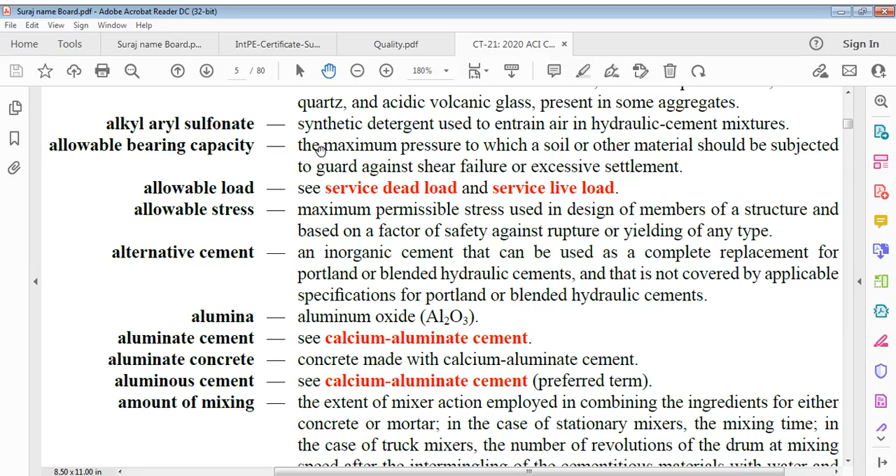Allowable load: service dead load and service live load. Allowable stress: maximum permissible stress used in design of members of a structure, based on a factor of safety against rupture or yielding of any type.

Allowable stress restated: maximum permissible stress used in design of members of a structure and based on a factor of safety against rupture or yielding of whatever type.

Alternative cement: an inorganic cement that can be used as a complete replacement for Portland or blended hydraulic cement, and that is not covered by applicable specifications for Portland or blended hydraulic cements.

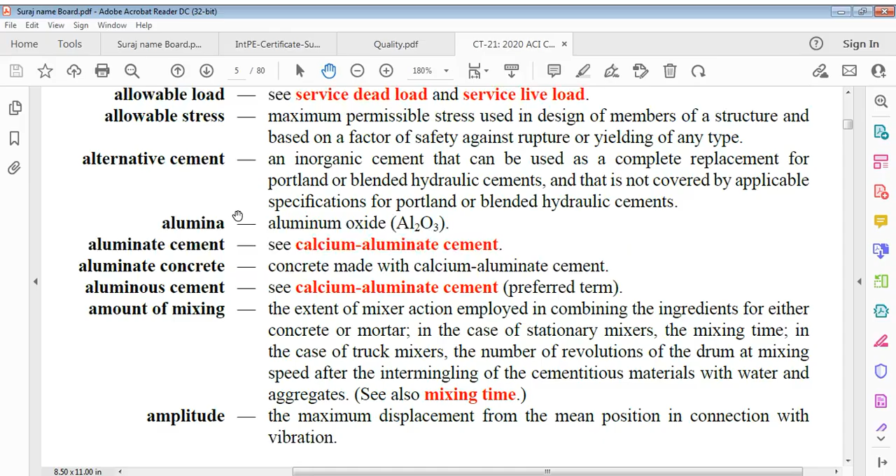Alumina is aluminum oxide, Al2O3. Aluminate cement is calcium aluminate cement, and aluminate concrete is concrete made with calcium aluminate cement. Aluminous cement is calcium aluminate cement.

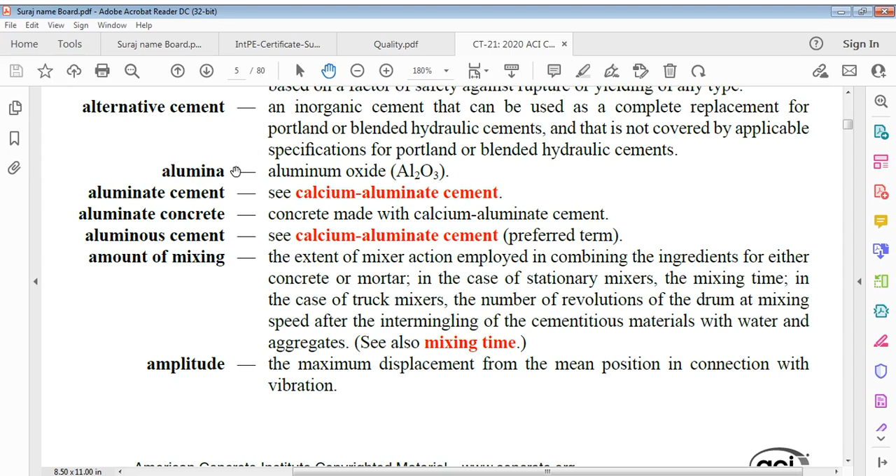Amount of mixing: extent of mixer action employed in combining ingredients for either concrete or mortar.

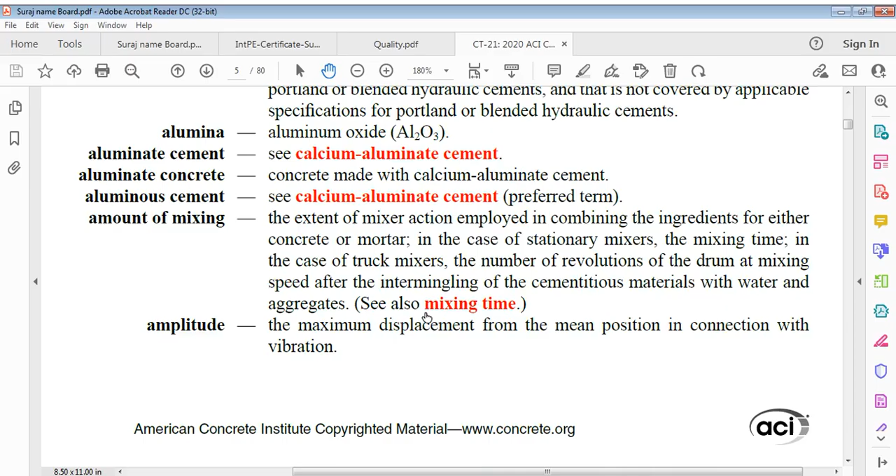We have gone through certain terminology of engineering materials mentioned in ACI. This is page 5 of this note, and we conclude here today.